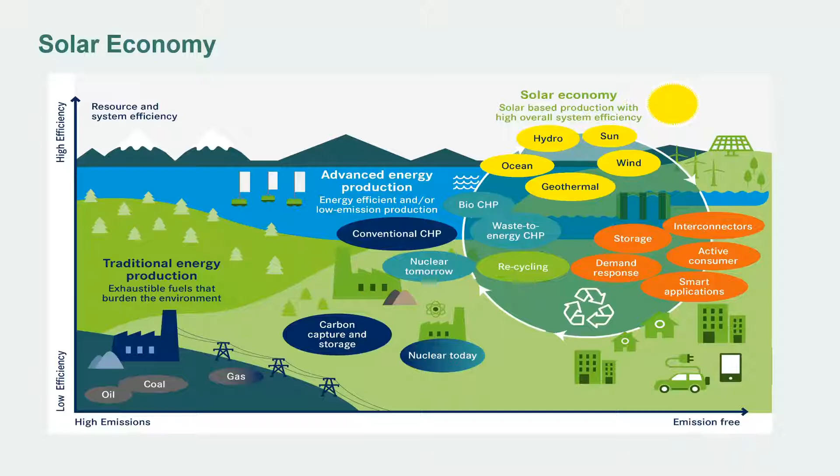In our solutions we have the power plants, then we have the heat network, and then we have the consumers who are using the heat. The production is, as I told, traditionally that how much the consumers are using, we are producing so much.

In the new system, we want to have two-way communication with the buildings. So we know how much the building needs heat, and we can forecast the future in a short time, like one day ahead, how much the building is needing heat.

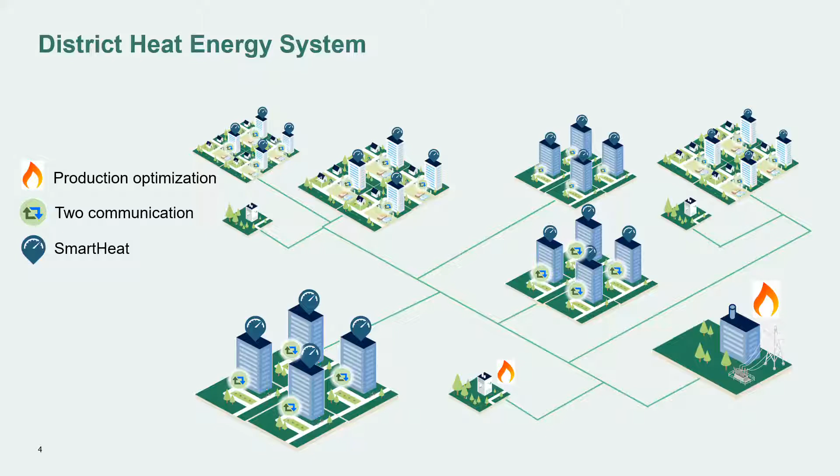With this smart heat solution, we can also steer the heat inside the buildings. So we know exactly that this building needs that amount of heat. And sometimes, for example, if people are using a lot of hot water, we can lower the heat inside the buildings. So we can balance the heat demand in a great way.

And the people don't notice inside the buildings, because actually the heating network inside the building is quite a big battery. So if the heating is off for like 1 hour or a couple of hours, the resident doesn't even notice that there is something happening in their building. And that's something great that we can really do something smart in the future.

And then, because we have this production side, we can even do that if the electricity price is high in our CHP power plants, we can load the heat sometimes in the building. So we can really see the situation in the building in real time. And we have the whole value chain, from the resident to the power plants.

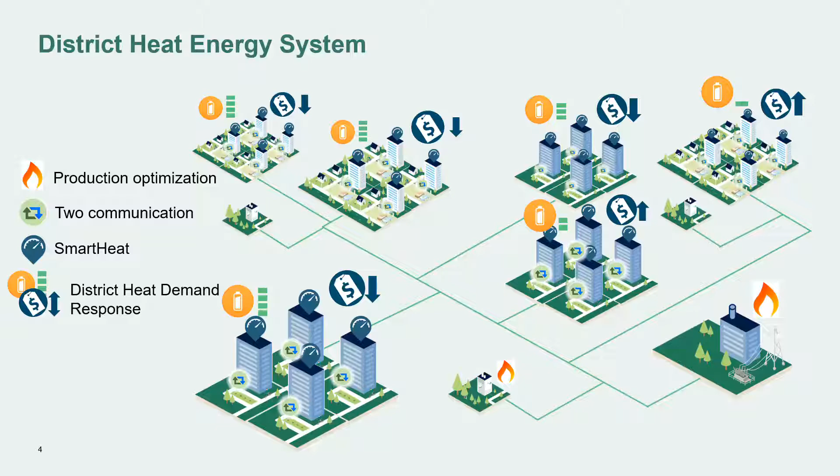For example, office buildings, in the morning they put the air conditioning up and running. There is a peak load in the heat system at that time. So in the future we want to balance that heat demand to be more stable, and have the whole control of the system.

And the basic situation is that we have this CHP, combined heat and power plants, going there. They are producing the stable production, and then we are using the heat boilers, which can only be a couple of hours per day that we are using one heat boiler. And of course it's quite expensive to start the boilers up and running and then take them down after a couple of hours, so it's not wise, and most of the heat boilers are using fossil fuels, oil and gas, so we are trying to get rid of that in the smart system.

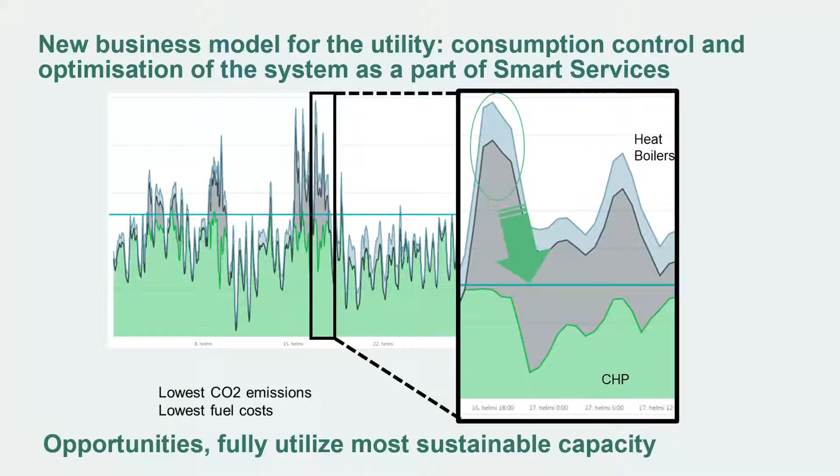In our service, we are putting sensors in apartments, in every apartment, and the sensor measures temperature and humidity almost real time. So we know what is the situation in every building, in every apartment.

Then we have artificial intelligence that always knows the optimum, how much every building needs heat. Every 10 minutes it calculates the heat demand in every building. We have a Finnish company called Lean Heat who is our partner and does the artificial intelligence part of the system. If you want to know more, Vesa Jaakkola is here, so you can ask him, and there's also a brochure where Lean Heat is mentioned.

What is the benefit of the system for the residents? They get more stable indoor quality. They get data from their apartment situation, and we've gotten feedback that they really like the system. And of course, we can produce the heat more ecologically and get benefits from the production side.

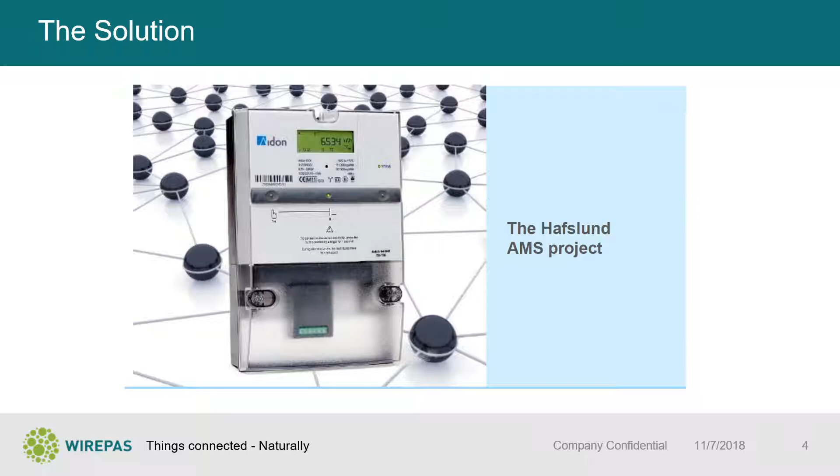But now coming back to Hafslund - the planning phase is the most important one. As a utility, I can only recommend you have a plan, have an idea, and execute on this plan. The background for the investment for Hafslund, as for most smart meter rollouts, was the regulatory requirements - that these meters have to be rolled out until the 1st of January 2019, a full rollout. So we have November, I think we can tick the box in Hafslund.

And the project strategy - this is key - you have to be clear on what role you want to play in your own rollout. In this case, Hafslund Nett decided at a very early stage that they themselves would become a system integrator. So they did not outsource the full project to some system integrator that just gets an SLA when the data has to be delivered and gets a certain amount of money for data delivery. They decided to do everything - control, steer, integrate everything themselves - and set up a partnership model.

So, no ceding of responsibility. The final responsibility for the final rollout on the 1st of January was with Hafslund Nett, and it was fully under control.

The next one is very important. I've seen a lot of smart metering rollouts, I wouldn't say failing, but delaying and exploding in cost, where there was no partnership model with the suppliers. It was more a supplier relation - how you treat, let's say, a hardware supplier - with bashing, punishments, and a lot of legal involvement and details on the contractual side, instead of solving the problem. It was more a fight over getting the penalties done. In the case of Hafslund, the partnership model was all in one boat, achieving the objective of the 1st of January 2019. So trust and common objectives are very important when you manage your partnerships.

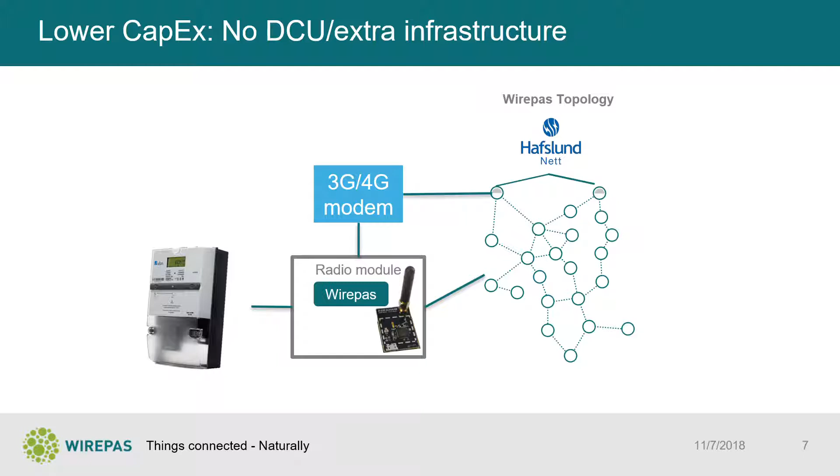In this network below, you see uplink meters or uplink points, mainly based in substations in this case, but can also be simple meters with an additional modem on top. The ratio is between 30 and 50 meters per uplink, because Hafslund wants to be very resilient, or redundant, on communication. That means if one uplink meter fails, we have automated load balancing in the system - they can reroute this data to the next one, and that happens automatically. We're now expanding this into use cases in apartment buildings with a lot of tags and sensors, which could theoretically connect to this network using 870 megahertz and use it as uplinks. So we're completely agnostic on application, which gives Hafslund the opportunity to add other applications besides metering into the same network, giving them freedom in their communication choices.

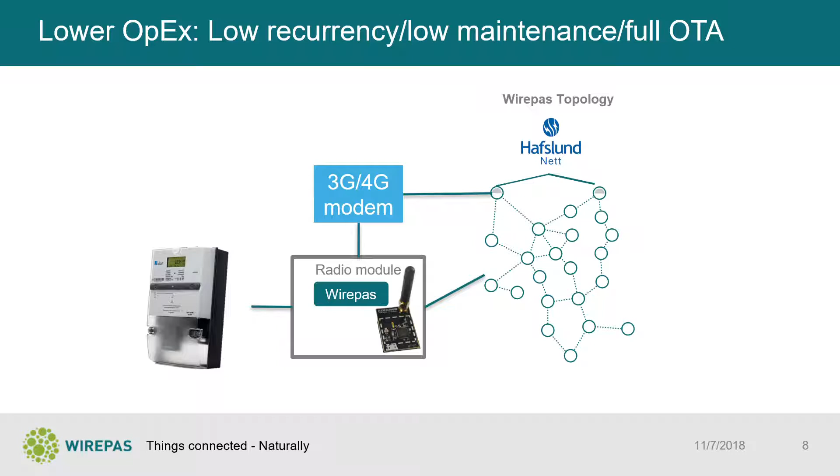On the OPEX side, this system does not create recurrent revenues or costs other than the data rate for the mobile operator on these 30 to 50 uplink points. There's no service level fee to a third party for planning or maintaining the network. What can be next? The discussion is always around the meter firmware becoming outdated after 3 to 4 years, and wanting to add this and this application on top.

Many systems cannot download firmware, sign firmware, or keep the security intact. This system has been 100% OTA capable, and all the processes of an over-the-air update standard are implemented. The system is also prepared to not flood the network. It's a very intelligent propagation of the new firmware.

This is something we've learned as crucial feedback, which wasn't considered in the first planning. Back then it was about compliance to regulation, and now it's about realizing we can do many more things with a smart meter than we thought initially. But doing a re-rollout, a revisit, or local flashing is by far too expensive. So what they're doing now is controlling the meters remotely and downloading grid-side applications, and maybe in the future flexibility services into the meter.

So the key takeaways from this successful rollout: have a strategy, and execute in partnership — that's so crucial. Not everything went as smoothly as I've told you; there were a lot of steps and difficult things to solve during this kind of project, but I'm not here to share all of that. It's always about execution in partnership. It was not about throwing things at people, blaming, or finger pointing. It's really always about how do we solve the problem, how do we reach the objectives. I think that's also, when we talk about Nordic innovation, a role model for how to work together.

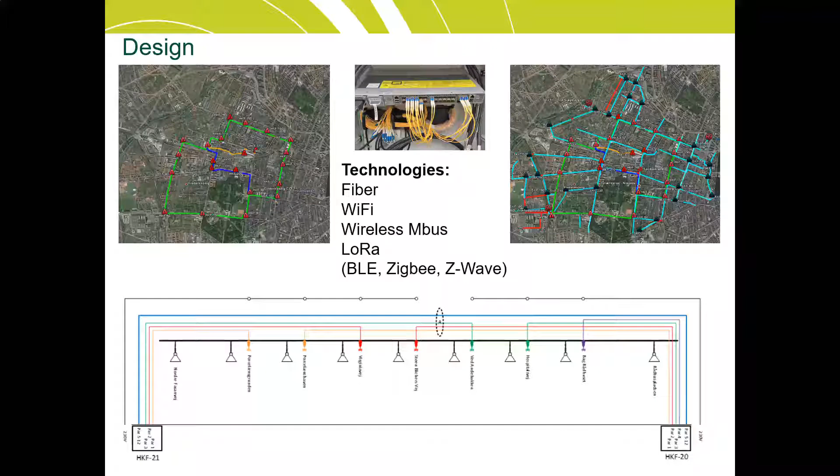Here's a printed drawing of how we actually did it. We've installed a lot of cables and all that, and I don't know if it's wise, but now we have Wi-Fi all over. We're using it to connect to heat installations like substations in basements and all kinds of things, gateways, connectivity to all this online, and that was really important for us.

At the same time, we have all the other standards we can use as we please, because the business case was really that if we want online data, we get it. We don't have to think of cost with a telecommunication company, so we decided to overscale it a little bit and invest a little extra.

And that's what happened. Here is actually how many access points we needed to cover it, pretty much every 100 meters, mainly on wire but also on street light poles. All the red is where it's optic fiber connected, and all the blue ones are mesh connected.

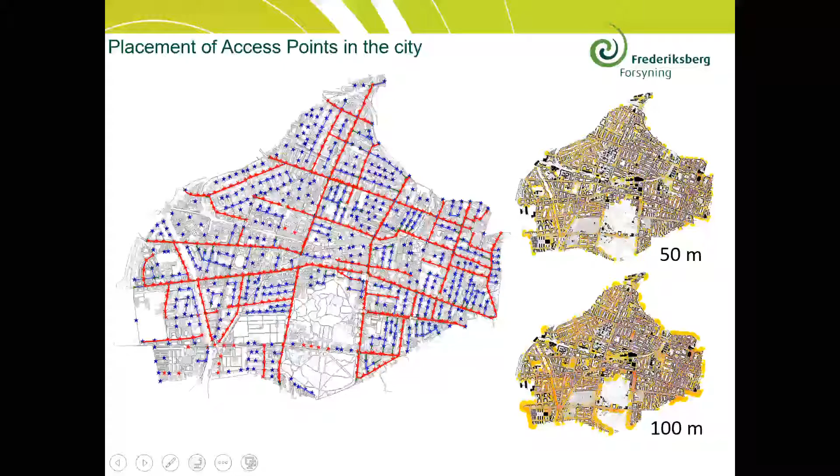The pictures to the right show how we designed it, where we placed each access point, and we used the GIS system to make a buffer around each access point, to see when it hit a building and where it got in between buildings, so we could see if we could reach all the buildings, including some backyard buildings. It's a bit hard when it's all 5-story or maybe 3-story buildings to get coverage everywhere, but we pretty much succeeded in covering all public streets, public parks, and public areas of the municipality.

Where are we now and where are we going? We're actually pretty much finished now. We have to change a few radio cards in some smart meters, but otherwise it's all installed, and we're optimizing the network now to get all the data home from our smart meters. It's about 10,000 meters, down to 16-second values for water meters, and maybe 1 to 2 minutes for district heating meters. We're not sure if we can use all the data yet.

We hope we're looking at different systems to cross-reference all the data, and one of our goals is, of course, to deliver good service to the customer, but for our network, both for district heating, we need to maintain that in 5 to 10 years. If we can push that by 1 year, we save 50 million Danish kroner, or almost 10 million euros. By using this data, we can do it a little smarter, maybe only take small bits and pieces out. We're not sure we can do it yet, but we hope we can use all this data so we know exactly what the flow in the pipelines is, like the pressure, temperature, everything, at any time.

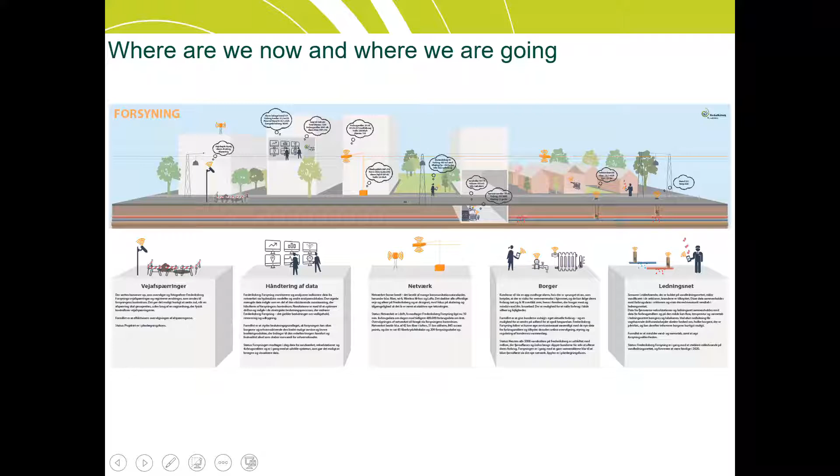Another area we're working really much with, and really close with the municipality, is climate changes in general. We have the sewage system, and Copenhagen has been hit by flooding a bit lately, and it's cost a lot of money.

So we're going to use the same network to find out how to invest money right, in climate streets and all that, and also basins to collect water, to hold back water, so the sewage system can handle it, because it'll be way too expensive to excavate and go down now. So that's another area.

In that way, we're also going to invest in weather stations, which we're also going to use for district heating, because we reckon if we find the way the wind is coming, the speed and everything, we can actually see how it affects buildings. Then we can at the same time monitor the consumption in the apartment buildings and all that, and hopefully we can make some savings, regulate it down, adjust the temperature, do something, deliver a better service.

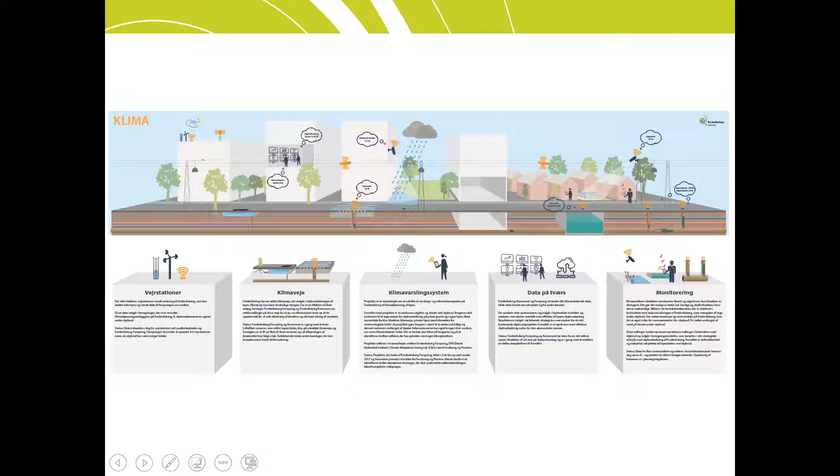Another area is, of course, mobility. We can use it, and that's mainly the municipality, but it's really important when we build this network that it was not only to read smart meters, it was also to expand it, scale it up, so the municipality can use it for mobility, for parking, which has a big influence on the utility company as well, with road work and all that kind of things.

How can we be allowed to block off the main streets in peak hour? We can maybe do that by using data from cameras and all that kind of things. And by installing this network, it'll take one or two days, and we have ten cameras up and running. It's really fast, scalable, because we have the network all over already, so we have power, we have connectivity.

Doesn't matter which platform, LoRa, Wi-Fi, Wireless M-Bus. We could also use narrowband IoT if it makes sense in a certain area. Then it's not our network, but it's like telecommunication. We actually don't mind, as long as we get the data home and we do it for the amount we want, if you can say it that way.

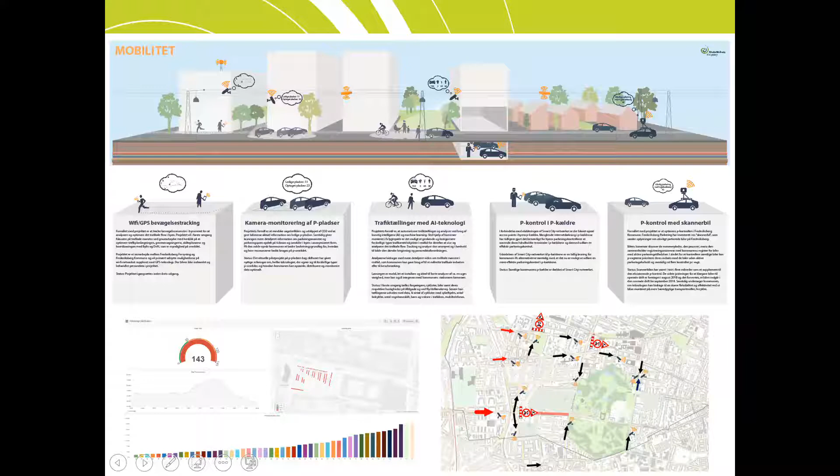Yeah, I don't know if I went too fast, but any questions? Perfect. Questions? If we have anyone? Not so far? Okay, thank you. Thank you.

Then I would like to welcome Christian Bøjarsen. Bøjarsen, yep, it's the first time I see that last name. Yeah, okay, good.

Yes, hello, my name is Christian Bøjarsen, and I'm head of office at a small company called Aalborg Energicenter, and it's part of the utility company in Aalborg. Aalborg is a city based in Denmark, in the northern part of Jutland. What I want to talk about today is how we think smart energy in Aalborg, what we do smart today and what we think we can do smart in the future as well.

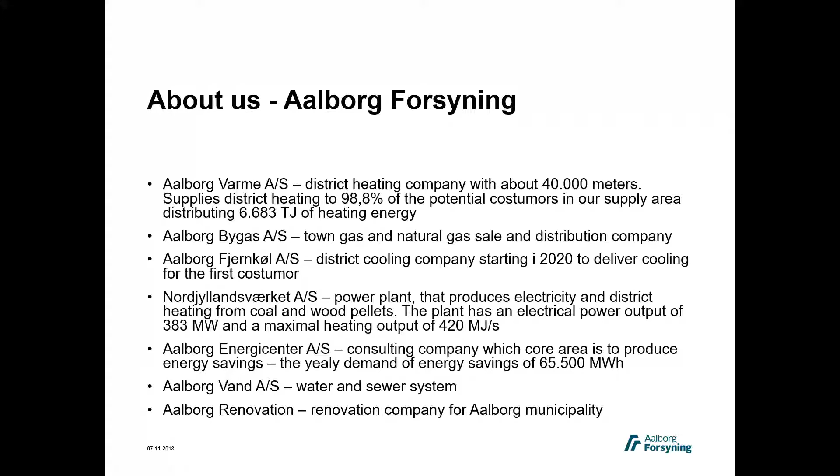So firstly, I'll talk about what we do today that's smart. We start district cooling now, our first customer on our system in 2020, and the way we do it smart is for a hospital being built in Aalborg right now. What we do smart is use water from a very deep lake we have in Aalborg, which is all year round between 5 to 13 degrees. By using that, we can deliver district cooling with a COP of at least 30. So that's one thing that's quite smart. Besides producing cooling, we also produce heat to our district heating system.

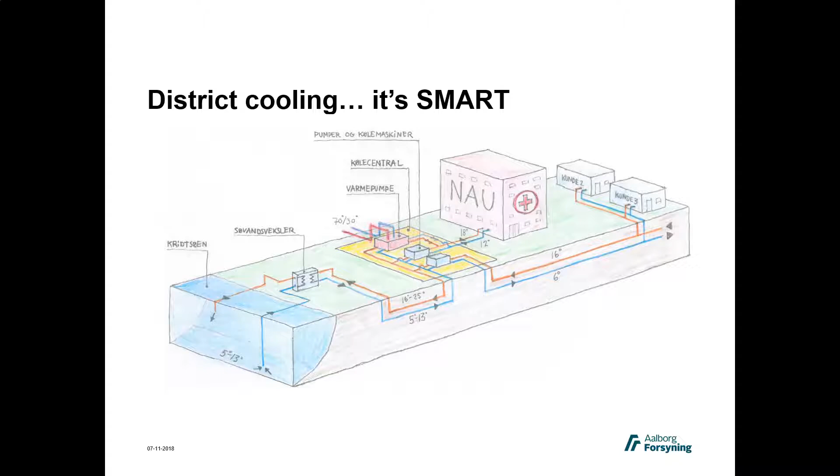Furthermore, we think just district heating is quite smart. One project is this nursery, this gardener in Aalborg. He had 11,000 square meters of greenhouses. He converted coal and oil to district heating, and the price for modifying was 350,000 euro. He gets subsidies from the government for 230,000, and he made yearly savings of 40,000 euro. So for him it was a good case.

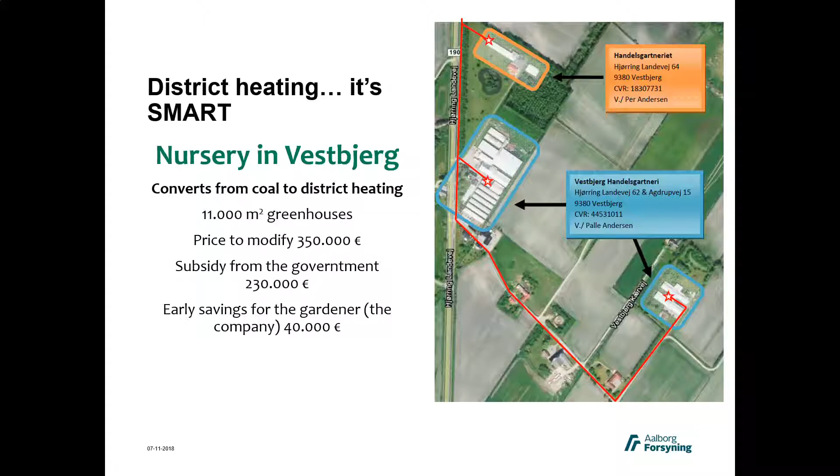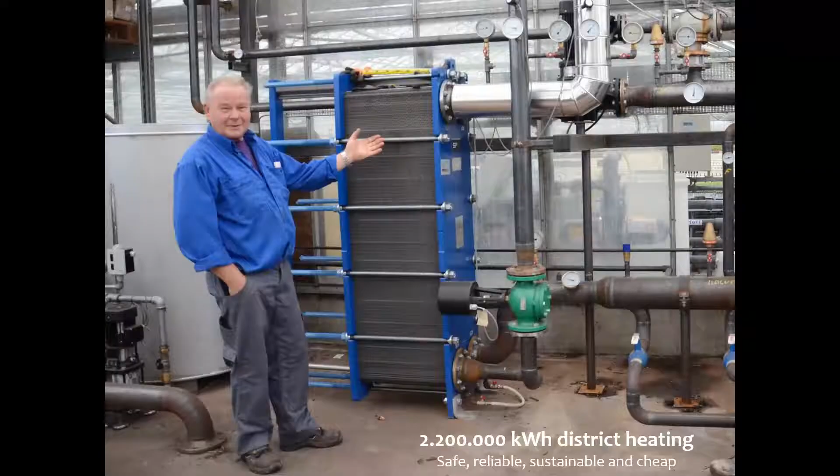But the smart thing about district heating is he went from this, a bit more than 500 tons of coal and 7,000 liters of oil. His system was unstable, he couldn't rely on it, it was expensive, and it's dirty and polluted. And he went to this - you see, he's quite happy. He uses a bit more than 2 million kilowatt hours of heating. It's safe, he can rely on it. It never goes out when it gets cold. It never stops. It's sustainable, and for him it's cheap.

And what's smart is if we put this CO2 saving in perspective. Just by converting this coal to district heating, he saved 1,250 tons of CO2. And just converting one gardener, one company, that equals to putting 1,200 Teslas on the street - picking 1,200 fossil-fueled cars away and putting electrical fueled cars on the street.

So that's really a big part of what we think is smart. If we turn to our company, how it is today, the mix of district heating in Aalborg today is based on 35% renewable energy, and the rest is fossil fuel - coal, oil, natural gas. But we have to transform, make a transition from the fossil fuels to renewable energies.

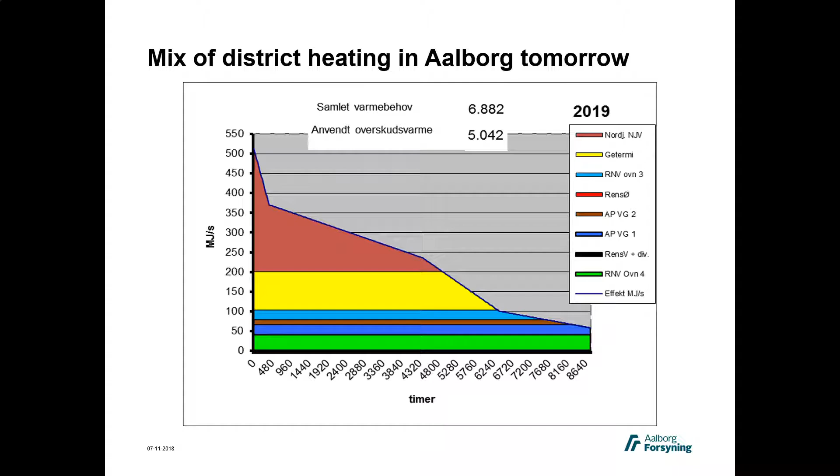The first thing is geothermal energy. Starting next year, we are planning on converting 100 megawatts of coal energy to geothermal energy. And it's a big part of this transition the district heating is going through. We are right now going close to the fourth generation of district heating, where it's fossil free, CO2 neutral.

That means we don't get the district heating, we don't get the heating from one big boiler as it is today, our electricity plant - we don't get it from there. We'll get it from numerous different producers. We'll get it from windmills, from solar panels, from geothermal energy, from surplus energy from the industry, from whoever can produce energy for us.

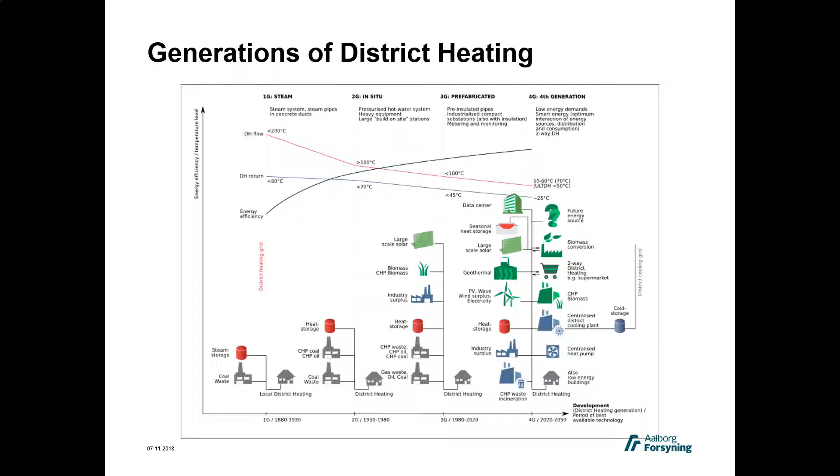So that means when we move from this kind of production that we really know, the coal production, to producing this heat with a very broad, very different, very numerous kind of producers - that also means we have to make a transition for the consumer and integrate them, integrate the household, integrate the buildings in the energy system. It's not that we can just continue seeing the consumer as a customer. We have to see them more like an integrated part of the whole energy system for making our district heating system work in the future.

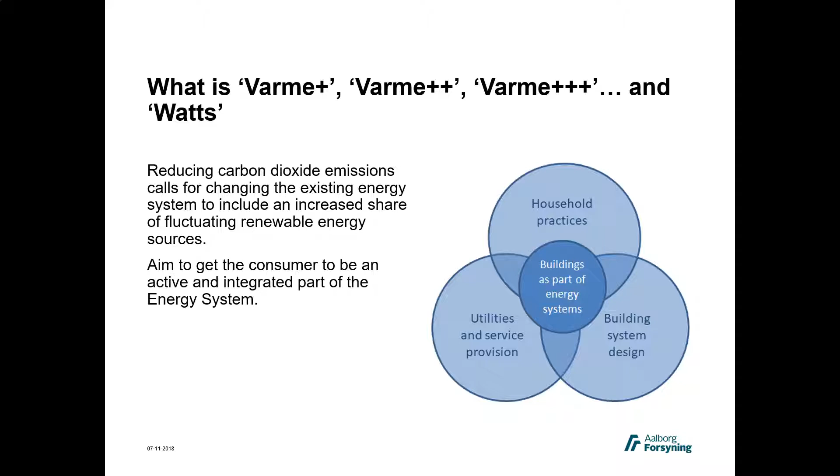So how do we do that? Right now we are introducing remote meters. We are halfway through - we have installed around 20,000 remote read meters. We are introducing what we call Varme Plus, it's Heat Plus - I'll come back to that a bit later. We are working on a project with the local university where we try to integrate the households in the energy system. And we are introducing heat surplus from all our customers: industry, grocery stores, buildings, our cooling plants - everywhere we can use surplus energy.

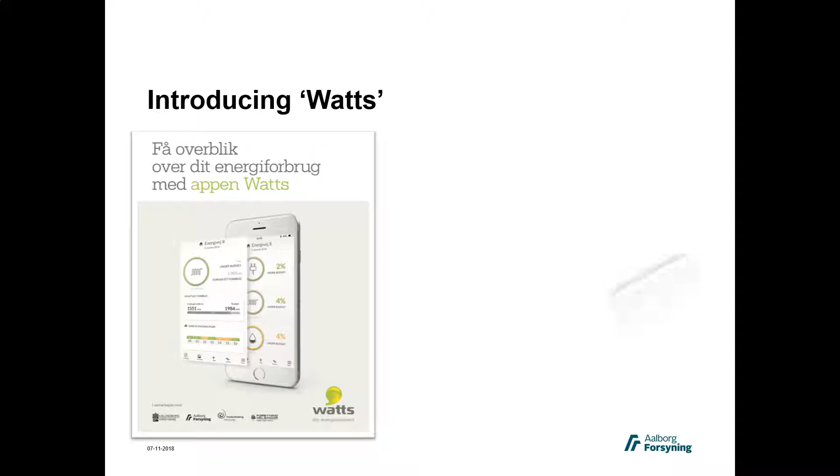This Watts is one of the first main things that we are introducing. We are going live with this almost as we speak. It's an app based on your smart device, your iPhone, your iPad, or your smartphone, and it can include all your utilities. You can put your electricity in there, your heat, district heat, your water, your gas consumption.

The idea here is that it's live data. So when it's 12 o'clock, you can see what you have used from 11 to 12 o'clock. You can see your consumption almost live, because we think we need to produce live data to make it usable.

But furthermore, besides presenting this data, we also need to put in notification and alarms. We want to benchmark each customer to his neighbor or someone similar to him. We use intelligent budgets, meaning the system, this app, will know when it's cold, when it's windy, and that this customer will probably use this much.

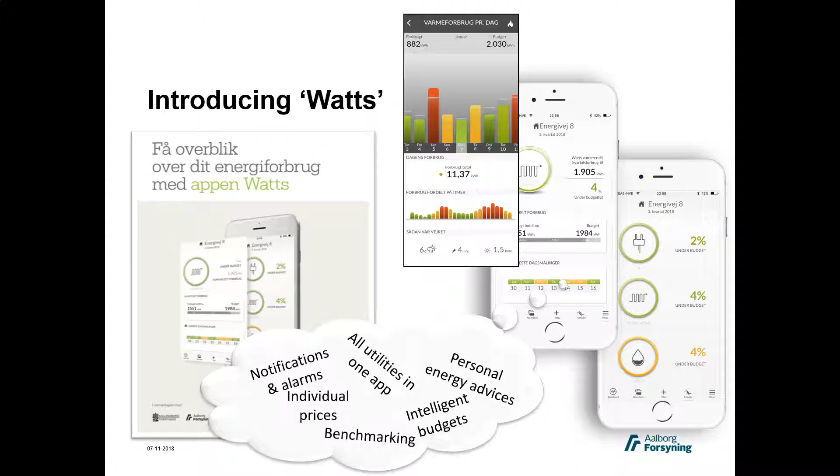But we have seen that over 50% of our consumers has errors in their heating system. And by changing the heating unit, we can make quite big energy savings. So our plan is that we want to be a part of the customer, we want to own this.

So we are proposing to the customer that he can rent this for just 250 Danish kroner - that's 30, 40 euros per month. He can get this for free, and we put it up, we maintain it. If it breaks down, we shift it.